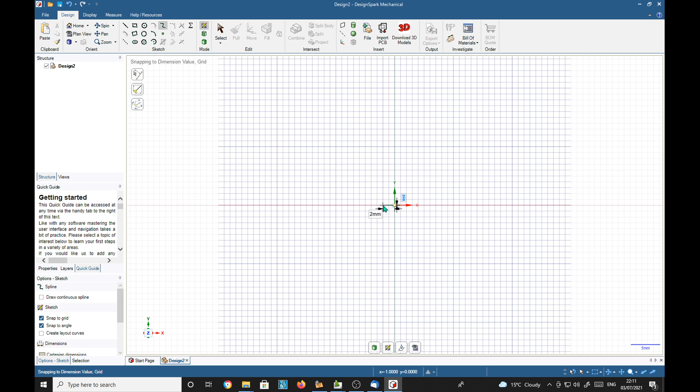Spline tool, spline, yes. So we'll start at the center and we'll have one knot there, another one here, continue on a bit, gradually curving round, using your artistic flair.

Maybe that's okay. No, I don't like it. It's got a dent here. Go back.

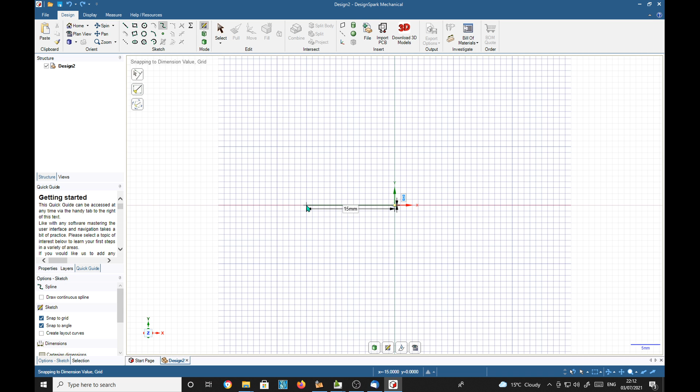So it's probably best that your first knot is above the horizontal line, because the way beziers and splines work is that they pivot about the knots.

So we'll put the first one here, and another one. You see what I mean? If you look backwards, you see it flexing at the knot in different directions. So I don't suppose you want that for this bowl, or that. So we've got to have some sort of compromise.

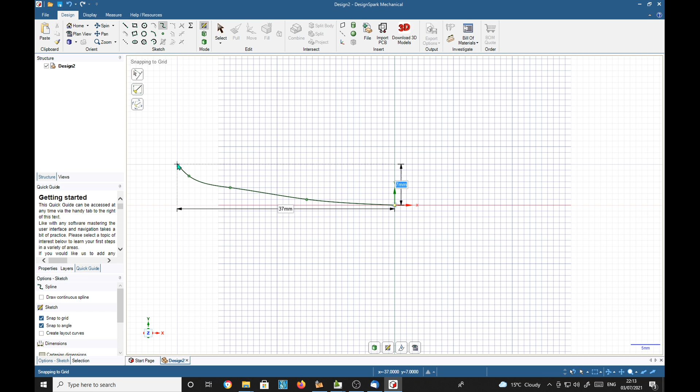So we'll go there, and around a bit further. Escape.

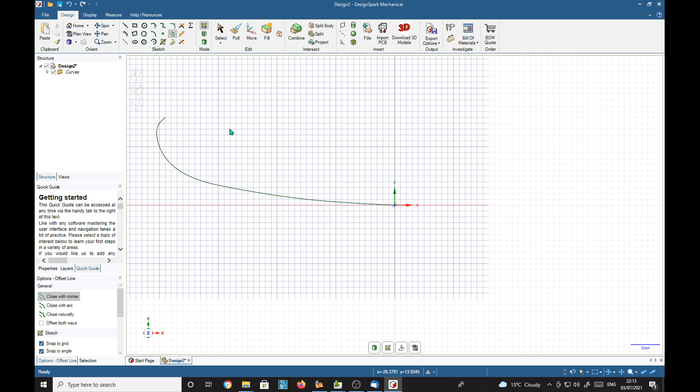And we're now going to choose the offset tool, offset curve there, and select our line, and we can move it to a thickness, so we can type the thickness in, 1.5 perhaps, return.

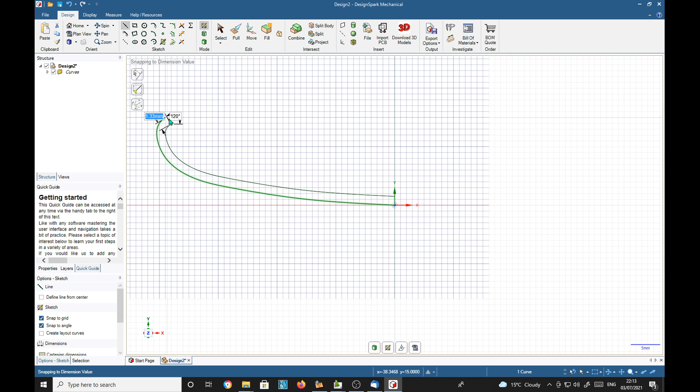And then we need to close off the ends with a straight line there. Now we see here we're not quite straight, but it doesn't really matter because it's still going to be our axis.

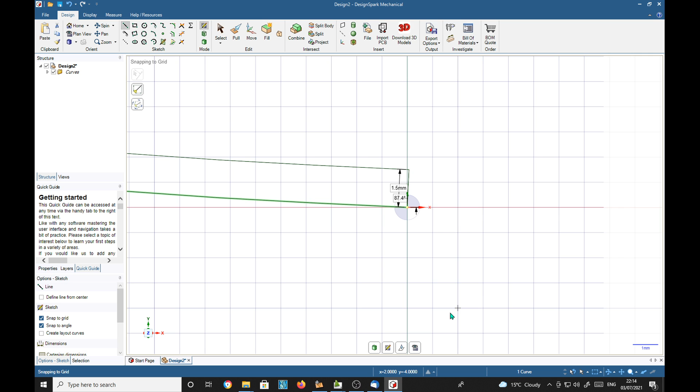No, I don't think we'll do that. We'll put that in, vertical line. Then we've got to trim this.

Now Bezier curves need to be trimmed. Split, click on the curve to split, then click on the curve or point to split it with. Right, so we're going to click that one and then that one.

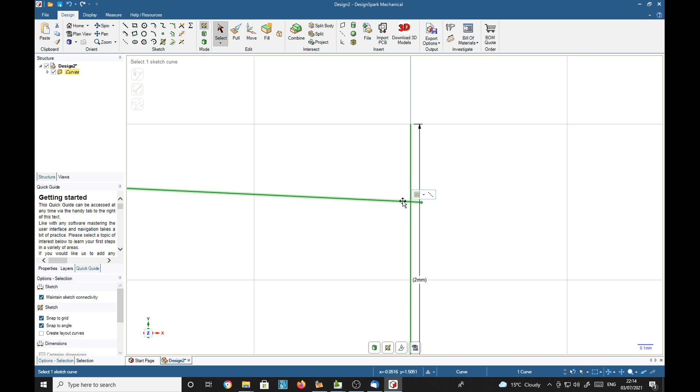That's it. Okay, so it's this corner one. We need to create a corner.

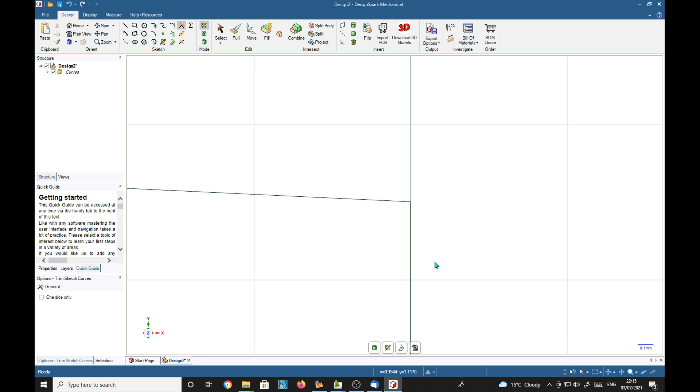So now all we need to do is the P for the pull tool, select the surface, rotate, select an axis to rotate about, which is this end one, and the full pull tool.

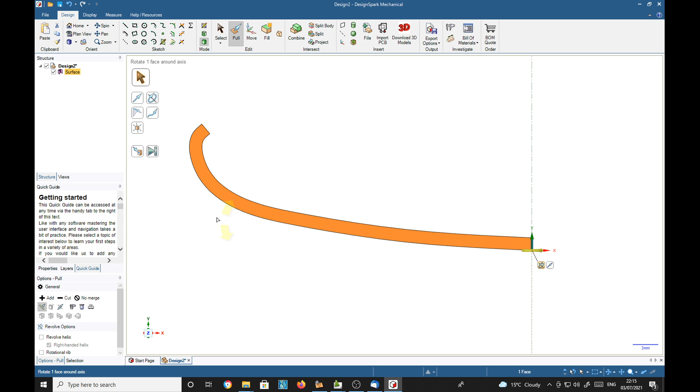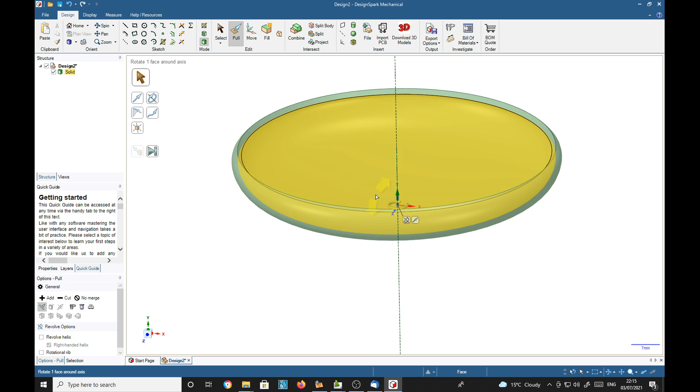There's your bowl without a flat bottom. You'll notice, of course, as well, with using the Bezier, you don't get any line around the bottom like you do with the other one. It's totally smooth.

That might be important for you. I'll just rename it.